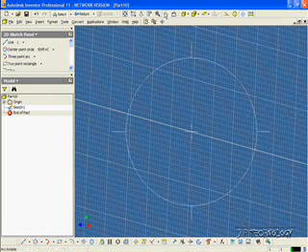Now what we're going to do is sketch a square and extrude it out to make a complete cube. So let's click a 2-point rectangle and make a rough sketch of it here.

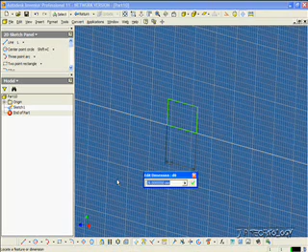Now let's click the dimensioning tool and make it 50 millimeters by 50 millimeters. For the first one, let's type in 50, and for the second one, we'll do 50 again. Now we've made our sketch, so let's click Return.

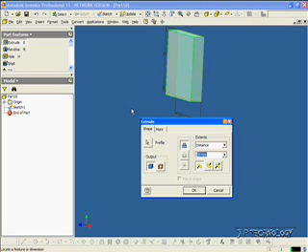Now these are all the features we're able to do on the sketch, so let's click Extrude. Usually you have to click Profile to select which sketch you want to extrude, but since this is the first sketch we've done, there's only one sketch, so Autodesk Inventor already selects it for you. The darker area in the back is our sketch, and the lighter area is what's being extruded out.

Right now only 10 millimeters is getting extruded out. Let's change it to 50. Now you can see that 50 millimeters comes out and it's a complete square.

Now you're also able to extrude it out in different directions from that sketch. Right now it's going to the left. We can make it go to the right, and you can see our sketch there with the extrude going right. Or you can do a mid-plane one, which goes out equal distance from both sides. The sketch is the darker area inside, and the lighter areas on each side are the extrude coming out from the sides.

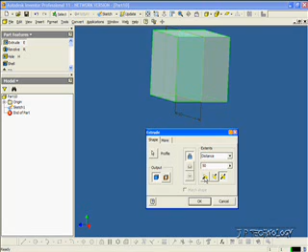But for now, let's just make it go all the way to the left. Click OK. Now let's click the Rotate button, and you can see our square, our perfect cube that we made.

Now let's choose another sketch plane. This time let's choose the XZ plane. Let's click Sketch, and rotate this up a little bit. We're going to draw a triangle, so click the line tool and just draw 3 lines that intersect together.

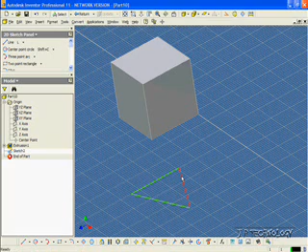Now it's important that your sketches are closed by the end, because say we have a sketch such as that - you're not going to be able to extrude anything from it because it has to be a closed sketch.

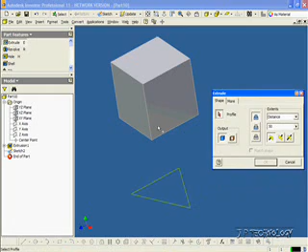Now once you've made your triangle, click Return, click Extrude. There's more than one sketch in here, so we get to select which profile we want to use. Once you find the triangle and bring it over, it's going to highlight the profile in red. Click it, and now you're able to see a preview of where it's coming from.

For this one, let's do the mid-plane, and we'll do 50 again. Click OK. Now if we rotate this around a little bit, you can see that our triangle only goes up about halfway on the square.

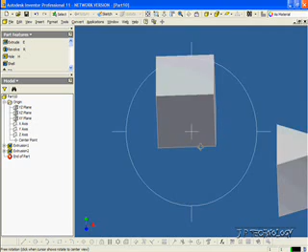Now, if we look at the cube we just made and the different axes or planes, we can see those 3 planes, but we don't actually have a plane on the top here, yet we're able to extrude off the top. If we click the top surface and then click Sketch, we've actually made a sketch plane on top of the cube, and we're able to sketch on top of that cube.

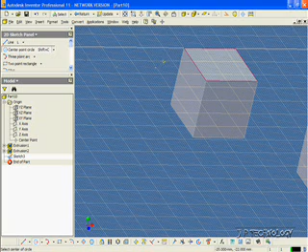So now let's draw a circle and extrude it up out of the top of the cube. Let's click Center Point Circle, draw a circle on the top, click Return, click Extrude. Now we get to choose the profile here.

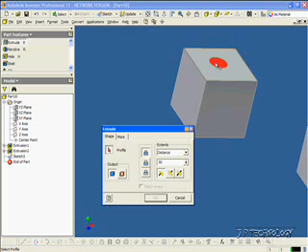If we highlight it here, we're going to extrude another square minusing the circle. If we select the circle, we're just going to extrude a circle up. So for the first time, let's just do the circle - we've highlighted it, let's click it.

If we zoom out a little bit, we can see that right now it's coming out. If we change the direction, it's going to go in and not do anything. If we make it go mid-plane, it's going to go halfway in, halfway out. So let's make this one go all the way out. Click OK, and now we've extruded out the circle.

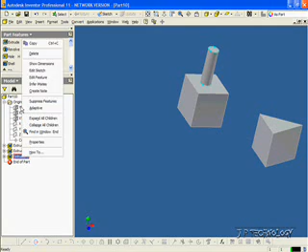Now let's go to extrusion 3, right click, and let's click delete. Click OK. And now let's draw another circle on the top again.

Click Sketch, click Circle, and we'll draw another circle on the top there. Click Return. Now this time we're going to extrude the square out of the top, minusing the circle. So let's click Extrude - the profile we're going to highlight is the red area there, so let's click it.

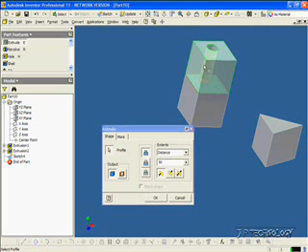Now you can see in the extrude that another square is coming out, minusing the circle. Click OK. And if we rotate it around, you can see inside that it goes down to that first cube.

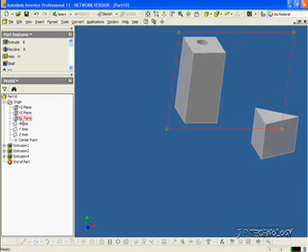Now another way an intersection such as this works for you is if you want to make a hollow pipe. So let's unclick the rotate, click the XY plane, click Sketch, and click a center point circle. We're going to draw one large circle, and then right at the center point again, draw another circle, a little bit smaller.

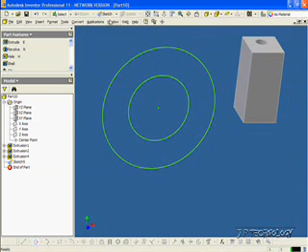Click Return. Now let's move this into the center a little bit. When we click Extrude, we're going to select that profile. Let's click that, and we're able to make a hollow tube in one shot from one sketch. Let's make this go out 300. Click OK.

And if we rotate it around, you can see that it's hollow and empty inside. And that concludes our tutorial on how to extrude a sketch within Autodesk Inventor.